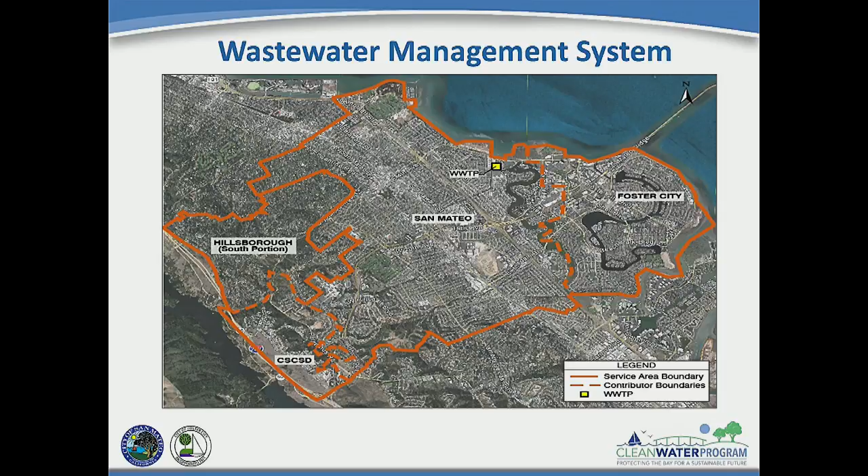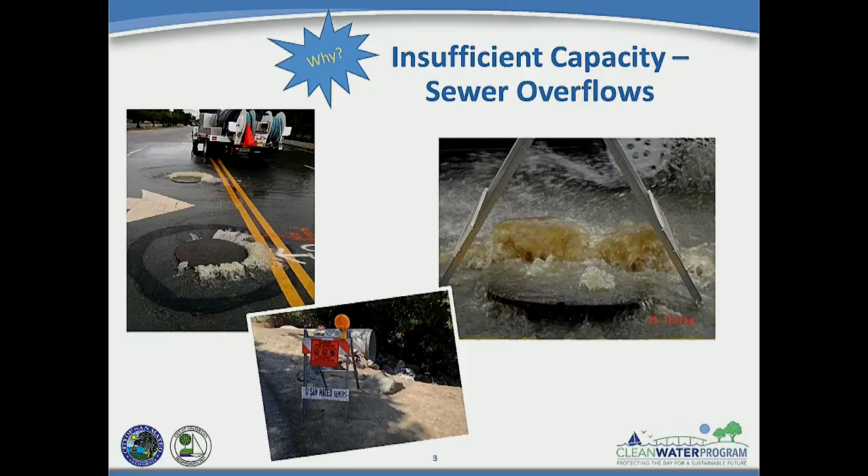And we can experience up to about 8 to 10 times the amount of flow during a wet weather event that we do during the normal dry flow that we generate on a daily basis. The other reason we're doing this is that we have aging infrastructure at the wastewater treatment plant as well. Many of these facilities are anywhere from 40 to 75 years old. There have been improvements to the treatment plant over the years. The most recent was completed in 2008, and there's still a lot of portions of this plant that are falling apart.

If you have ever had the opportunity, and we welcome you to come take a tour of our treatment plant, you'll see that there's a lot of aging infrastructure, and it's important that we have reliable, dependable, and sufficient capacity in our system, because if we don't and we have an operational failure, that can cause violations, it can cause raw sewage to be released, and again, these are all regulatory requirements that we need to meet at the treatment plant.

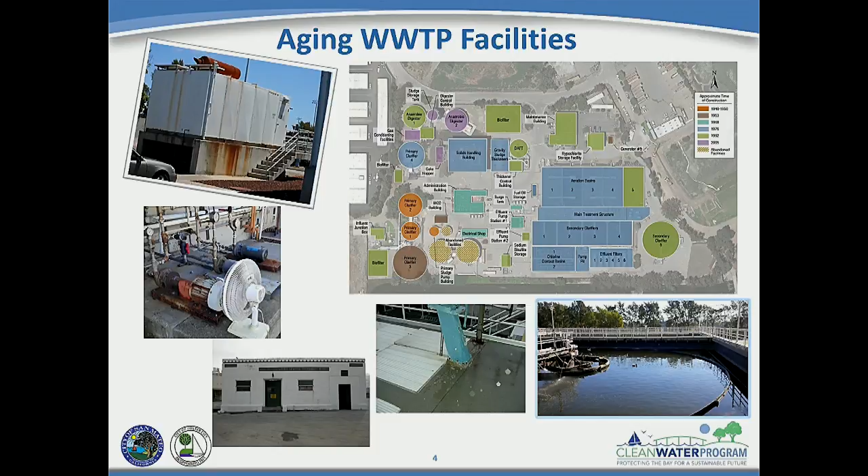And that's another driver for this, is the regulatory requirements. The system is regulated by the Regional Water Quality Control Board, which is an extension related agency to EPA, and they set forth regulations for the operation and maintenance and management of the collection system and the treatment plant. And so when we have SSOs, or incorrect discharges from the treatment plant of partially treated sewage, those are regulatory violations. And most recently, we received a cease and desist order in 2009, which included fines and included mandates for us to make improvements to our system to provide enough capacity and reliability to ensure that SSOs don't occur. It's also part of our permit for operation at the treatment plant.

The most recent one, issued in 2013, also requires that we make changes to our liquid process stream at the treatment plant to ensure that all sewage is getting properly treated. Right now, there's what we call bypassing or blending, where if we have too much flow coming into the treatment plant, we're taking some sewage that's partially treated, some of that liquid stream, and it gets mixed with fully treated, but it's still not meeting what the future regulatory requirements are going to be, because we're being told that we're needing to eliminate this practice. So these are some of the regulatory requirements that are currently driving the program.

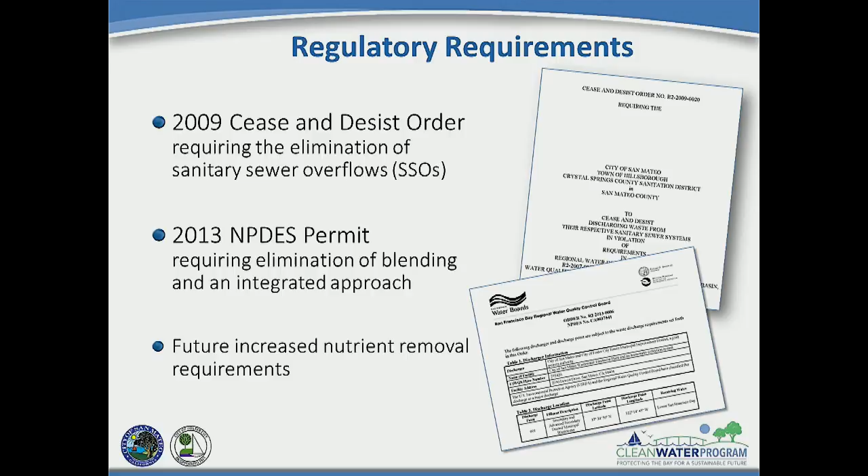So with the need to construct these improvements, there are also several opportunities for us to support and align with and progress the city's sustainability goals. So this does provide us an opportunity for pursuing recycled water. What we're planning to build is going to produce an effluent, which is the product coming out of the end of the treatment plant. Currently, it goes into the bay. We're going to have a plant that will give us the option of using that water for recycled water, because it will be treated to that standard.

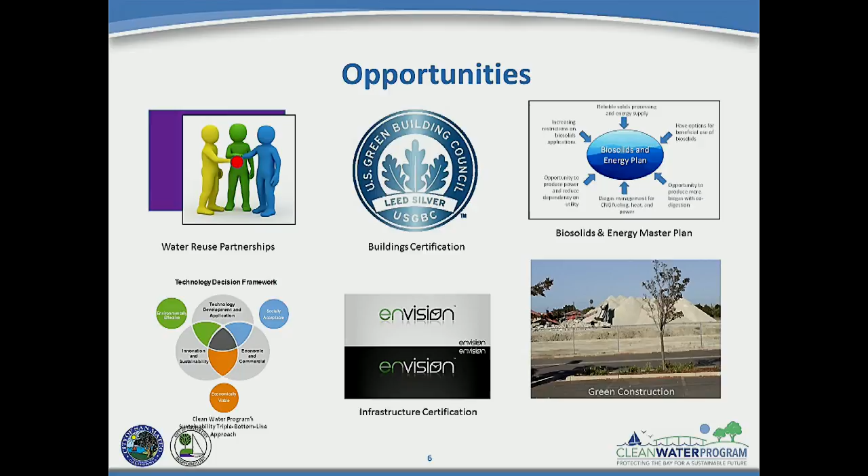So we're also looking at using the Envision system, which is similar to LEED. We have LEED requirements for buildings at the city. We are also looking at Envision as a way to measure how well what we build meets sustainability goals. And we're also looking at using green construction materials and biosolids. We're also doing a biosolids master plan, which will look at how we can use some of the solids coming out of the treatment plant and the gases, and look at ways for recovering energy from those.

So these are the drivers of the Clean Water Program. Again, the flow capacity is the biggest issue, the aging infrastructure, and the regulatory requirements, and then trying to meet our sustainability goals wherever possible. So what's involved in this program? What are the projects? Well, the projects were originally identified in the draft integrated wastewater master plan that was conducted and completed in 2014 and presented to City Council. And that recommends improvements at the wastewater treatment plant.

And that was combined and integrated with the plans we already had for some of the improvements in the collection system. So it's a mandate of the permits. It's something we were already working on, and it gives us a complete roadmap of what improvements are needed for the whole system. It was originally a 20-year plan, and these are some of the projects that are proposed.

In the collection system, we're looking at relief lines, which are additional lines to provide extra capacity during wet weather events, and rehabilitation, which may also include upsizing several existing sewer pipes. It will also look at rehabilitation to fix the joints and the leaks and the other ways that roots break apart the pipes and allow water to get in, and that's what causes this capacity overflow.

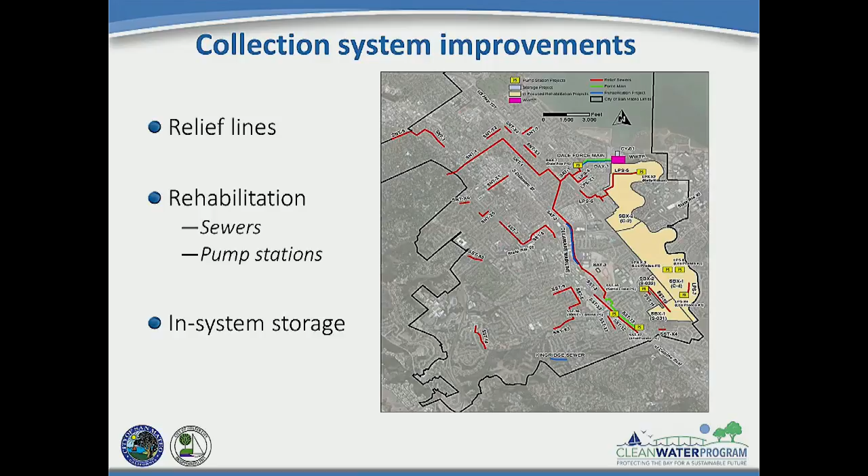We're also looking at in-system storage, which is a way to better manage the flow in the system. It's an operational improvement. It gives us the ability to hold wastewater for short periods of time in order to allow the system to clear and have more capacity and then release the rest of that water in. And you can kind of think of it as ramp metering for sewage.

So these are what some of the projects look like. We have relief lines. This is a picture from the Los Prados relief line that was installed in 2010. And then the Flint pump station. This is an example of what construction at a pump station may look like if we're rehabilitating or expanding.

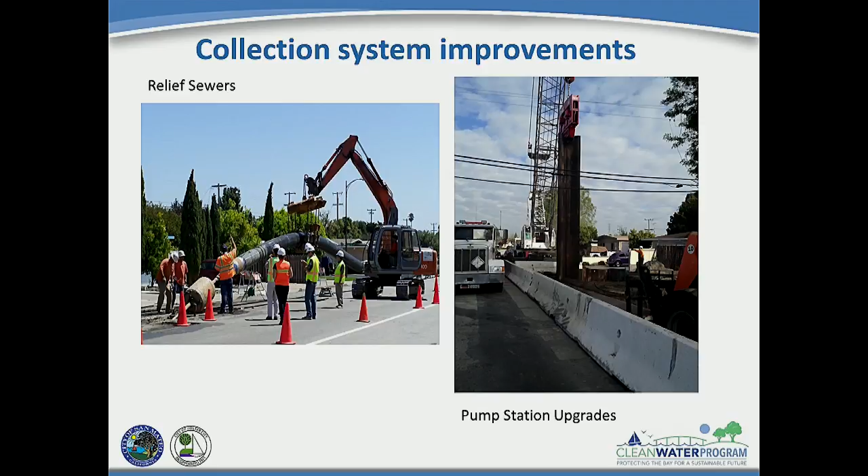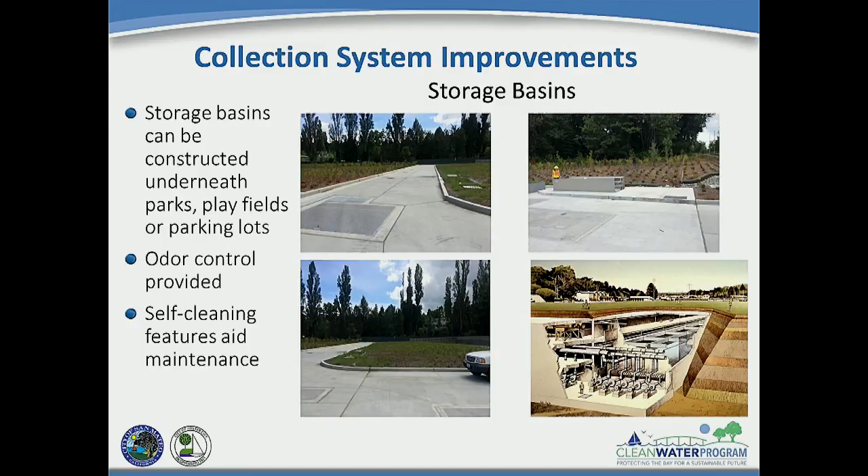This facility is located in a residential area. It's next to a preschool. It's across the street from a park, and there is planned additional development of housing on the lot immediately adjacent to it. 3 of our council members recently went and visited this facility and were able to see what it was like immediately after being filled with sewage and then cleaned, and see the benefits of how this can work and help us improve the operations and reduce these SSOs in our system.

So the treatment plant, the proposed improvements there include a new headworks and primary clarifiers. The headworks will involve grit screening and removal, which will take a lot of the harsh rock-like solids that come through in the sewage and take those out before they make their way through the rest of the process. Right now, we don't have that at our plant, and so a lot of abrasive materials get through the system, and they cause a lot of wear and tear, a lot of maintenance problems, and they reduce the life of the equipment. So this will greatly improve our plant.

We're also looking at complete change out and reconstruction of all the secondary process improvements. And this is to address that wet weather capacity issue that we currently have. We're proposing a membrane bioreactor technology that will, again, clean the water to a much higher standard so that it can be used for recycled water. We're also looking at some flow equalization on site at the wastewater treatment plant that will be used for the same process. And I'll be happy to answer questions after.

Want to try and get through it, and I'll be glad to answer questions, and then we'll be able to also talk to several of the team members.

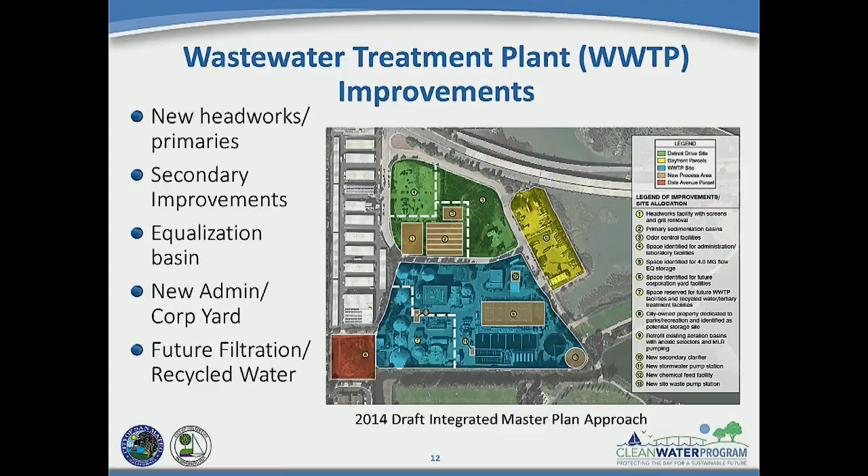So this is the program that was established in order to deliver all these projects, because it's not cost effective to deliver them one at a time, and it also doesn't meet the timing requirements or any of the goals of the program. So in 2014, we hired a consultant, that's CH2M. They are our program advisor, so they are experts in wastewater treatment and in program management throughout the world. And they are co-located with city staff, and we work together as a team to deliver the program. We looked at the goals of the program and reestablished those, and are looking for ways to more effectively deliver this. So one of the first things they did was look at the technology alternatives.

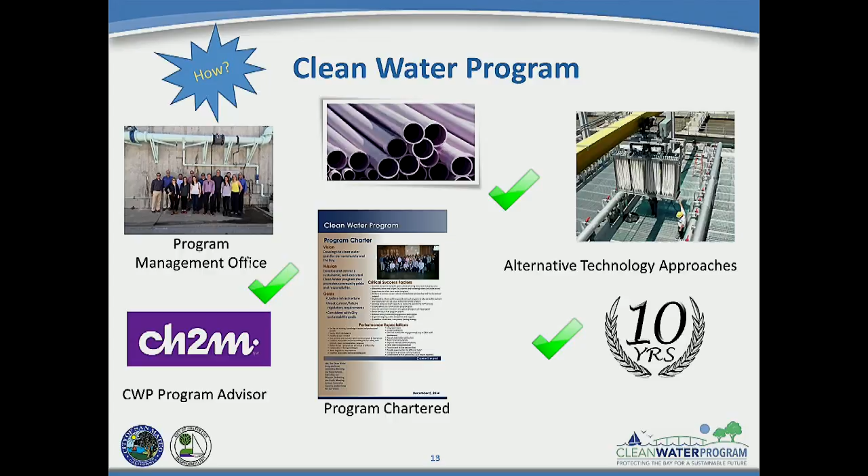And again, we're looking at a membrane bioreactor technology, which will be the least costly of the alternatives we looked at. It will provide us a better quality of effluent, which gives us the opportunity to use recycled water, whereas some of the other alternatives require even more construction to get to the same quality. So it is what we consider the best value alternative. And we're also looking at reducing the time frame from 20 years to nominally 10 years. That will help save cost in escalation of construction cost, and it will also give us the benefit of these facilities much sooner.

So, as I'm sure cost is the number one thing on your mind, the program is estimated to cost $900 million. And that's a lot of money, but these are very necessary improvements. We are looking at ways to reduce cost. One of the things we're doing is applying for state revolving fund loans. There are different ways to finance these capital projects, and the state revolving fund loans are a low interest loan. They're usually cheaper than some of the bonds we issue, and on this program it can save us a lot of money. Again, because this is a large capital investment, it will require sewer fees to pay the debt service on those loans, and so that will require some rate increases.

The city has been fiscally responsible in the sense of doing rate increases on a gradual basis. So over the last several years, the rate increases have averaged approximately 8 or 9%. This is a regional issue, and all the cities in the Bay are facing these same types of problems, and they all have similar aging infrastructure. Some cities are experiencing huge rate increases of like 50% or more. We are proposing to try and finance this in a way that will allow for the continued gradual rate increases so that we're not having huge spikes in those increases.

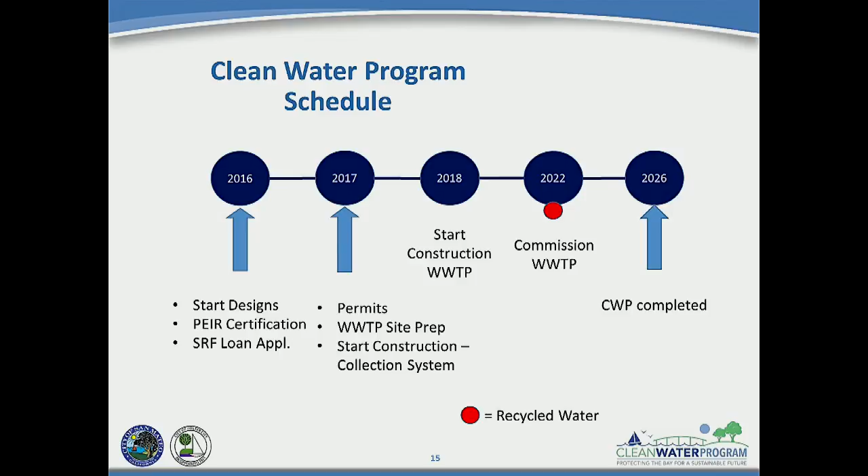We're looking to start construction of the treatment plant in 2018, with the majority of those facilities being commissioned in 2022, at which point a recycled water source would be available, and looking to complete all of the work in the Clean Water Program by 2026.

So our next steps, as I said: design, state revolving fund loan application, the CEQA process, obtaining the environmental permits that we need to do this work. We're also in process of our energy recovery and biosolids master plan. This will provide us a vision of where we want to go in the future.

The Clean Water Program is focused on wet weather capacity assurance and primarily the liquid process portion of the treatment plant. And we have some information about the basics of wastewater for folks who are not familiar with how the wastewater treatment plant works, because a lot of people don't really know about that or don't really care.

Yeah, most of the time, that's the whole point. We want to keep sewage out of sight and out of mind. We want it to stay in the pipes. We want to get it properly treated so that people don't have to worry about it. But if you're interested in knowing more, we do have people around the room that can talk to you about that, and we have some handouts that are available as well.

We've started and we will be continuing to pursue our recycled water partnerships with Cal Water or other potential purveyors in the area. So we're looking for someone who will take our product out of our treatment plant and then distribute it for recycled water use.

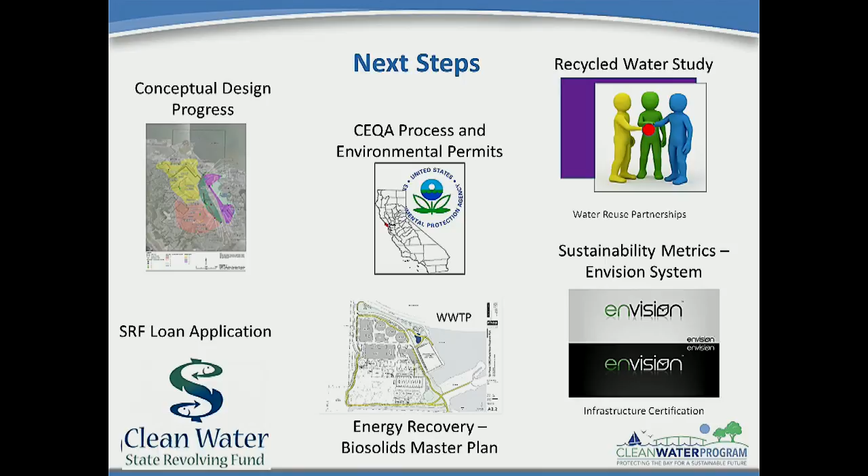So again, just to restate, we need this for wet weather capacity so that we don't have sewage flowing in the streets. We need to be able to treat the sewage properly. We need to meet all of our regulatory requirements. We want to be in the best possible position to meet all the future regulatory requirements that we're currently anticipating. And we want to continue to support sustainability goals and try to incorporate that in the program wherever possible.

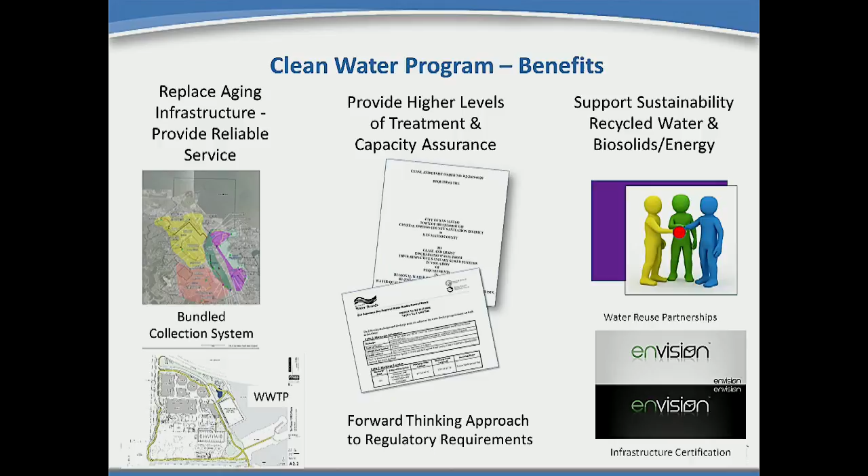So we have quite a bit of information available. We have Wastewater the Basics, as I mentioned. We have team members that you are welcome to come and talk to. We also have comment cards available in the back at the public outreach table. If you would like to leave us a question, a comment, contact information, feel free to use the comment cards. We also have email notifications that you can sign up for. If you're interested in getting notice by email, please talk to Jonathan in the back of the room after the discussion, and he can help you sign up for those.

We also have a website with a lot of information posted there. We try to put updates there. This presentation will be included there. We're also open to coming around and providing this presentation to homeowners associations, or to just come and talk to your associations to answer questions. We also have an email address for the program and a phone number, so if that's your preferred method of communication, you can use that as well. And we are also open to any suggestions you have on other ways to be contacted. I know Jonathan is also starting to get us out on some of the social media and in coordination with our city website.

So again, I just want to thank you for your attendance this evening, and we are open to answer questions. I can answer a couple questions now if you'd like, but I do want to give everybody the opportunity to walk around and look at the material.